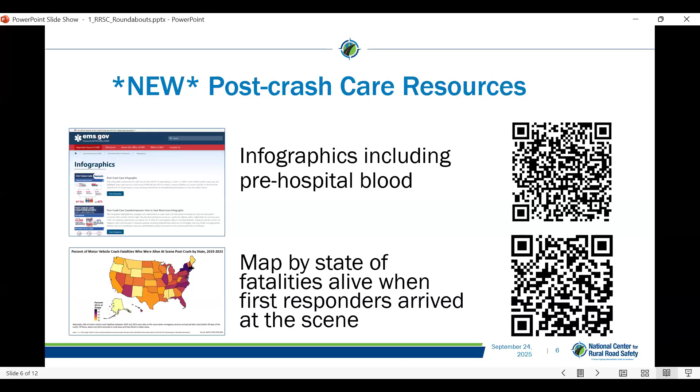If you joined us for Rural Road Safety Awareness Week this summer, here are some updated resources for you on those topics. We also have been notified that the Federal Advisory Committee opportunities are open right now. They're accepting nominations on or before October 20th for the Motorcyclist Advisory Council and the National Emergency Medical Services Advisory Council. So if either of those are of interest to you, please go to these QR codes to learn more at their Federal Register notifications.

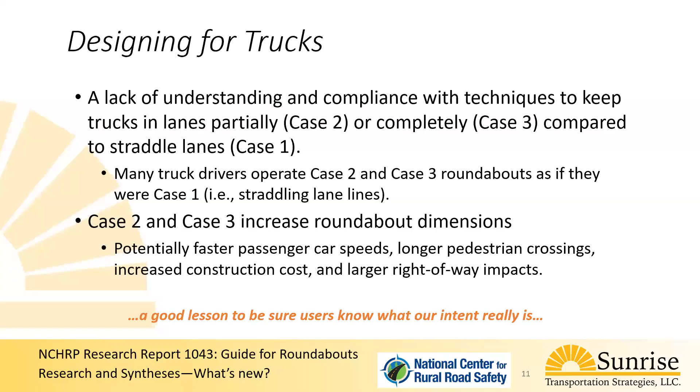But I think here's a really good lesson. We as engineers were designing for case 1, case 2, case 3. Our users, the truck drivers, didn't know how to use them. So let's make sure we know where and how our users operate.

So the guide itself recommends two things: straddle lanes or stay-in lanes. The straddle lane is suggested as the beginning point because most truck drivers simply don't know how to use the traffic control devices, the roundabouts. That's not saying they're bad truck drivers - it's just that we haven't conveyed that in a way they understand.

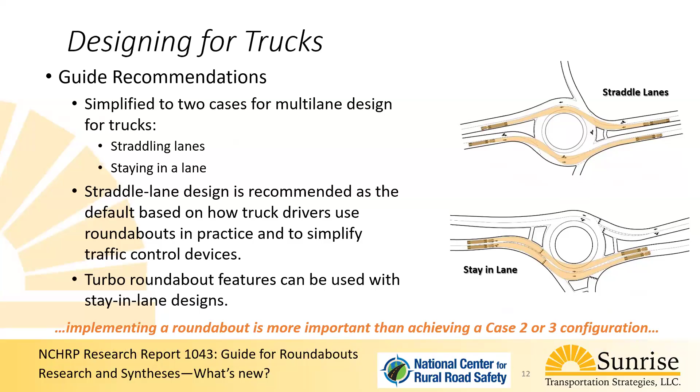But now we can use turbo roundabout features to support lane discipline for stay-in-lane designs. The intent in 1043 was that getting a roundabout implemented was more important than losing a roundabout because we couldn't achieve that former case 2 or case 3 configuration. So there's nothing wrong with designing for stay-in-lane designs, but we don't want to lose the opportunity for roundabouts if we can't get that feature.

While bicycle principles, techniques, and design have changed so much since 2010, there's an emerging typology, and what we were looking for was designing for the interested-but-concerned category of cyclists. What we find in the guide is bicycle treatments that really illustrate a range of different treatments for a variety of configurations, and you can mix and match those.

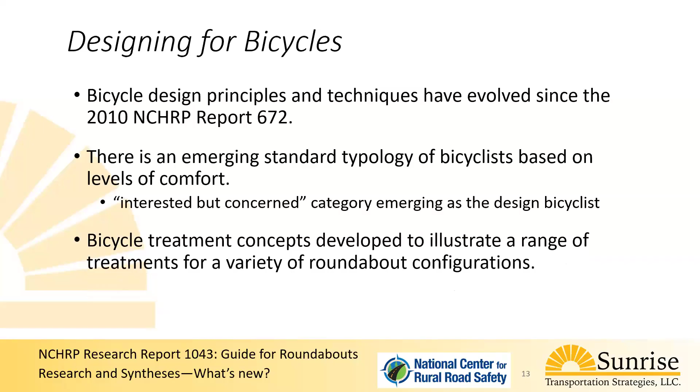But the intent was to focus on principles that allow you to make flexible design decisions for your project, for your context at that location. There's a lot of information too about designing for bikes and pedestrians, but what we were looking for is fundamental principles: reducing speeds at conflict points, separating modes where we can, clearly communicating the priority for each of the users, providing simple and direct alignments, making sure our geometrics support how we'd like it to operate, and making sure there are safe and comfortable spaces for people to work through the intersection form.

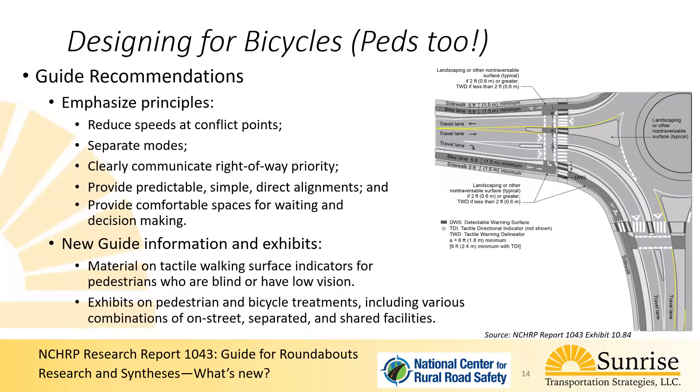So the new guide includes a lot of material about walking surfaces and how to support people with low vision, lots and lots of examples of ped and bike treatments for a variety of locations. We can't get every single one, but you can mix and match and put the pieces together.

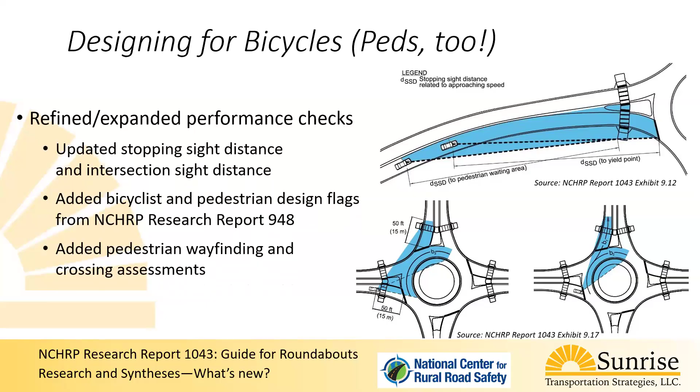There is some expanded information about performance checks, and Katie will talk a little bit more about that in her portion, but we updated the stopping sight distance and intersection sight distance. We added some new performance metrics for pedestrian and bicycle design flags from that NCHRP document 948, and added a pedestrian wayfinding and crossing assessment.

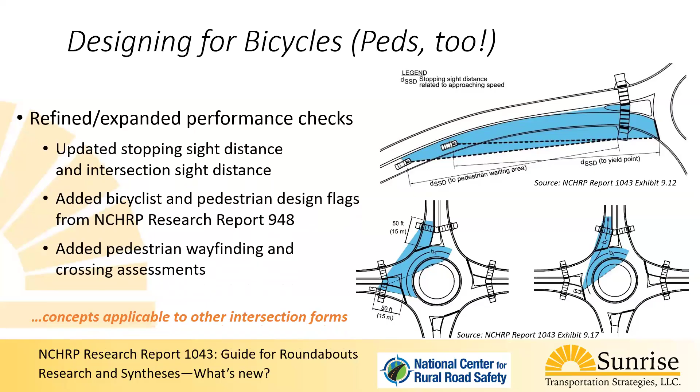The intent, what I really want to emphasize here, is that while this is for roundabouts, all of the things we're highlighting are directly applicable to your other intersection forms. So don't be limited by applying these principles only in roundabouts. Right now, I think the roundabout design guide has moved ahead, and these principles apply anywhere else.

Again, a lot of synthesis plans for oversized and overweight vehicles - these are common issues in rural environments, and Katie will talk a little bit about that. There's enough roundabouts out now that we can do in-service assessments and retrofits of our existing roundabouts to make them better. More information about mini roundabouts, economic benefit, a lot of syntheses on traffic control devices, and more information about illumination. So what we're really trying to do is understand the practices within those various topic areas.

So these synthesis plans became the input into the guidance in the NCHRP 1043 document itself. I'm just going to highlight a little bit about some of the findings from oversized, overweight vehicles. What we really found is those are often a case-by-case basis, each location with special users. So we have a lot of different examples in the roundabout guide for that.

I'll go into a little bit more detail, but what we found was providing real-world examples in the guide helps illustrate how you apply these design principles. Those performance checks that Katie will talk about are really applicable for how we check out our existing roundabouts and make them better.

Much more information about minis and compacts, and I'll emphasize this as we go through the conversation: the whole point was you call it a mini, I call it a compact, or vice versa—it doesn't matter. Don't worry about what we call it, but we should know that anytime we go to a completely traversable central island, there are some really significant design implications from signing and other features. So we just want to be thoughtful about it, but don't get caught up in the name.

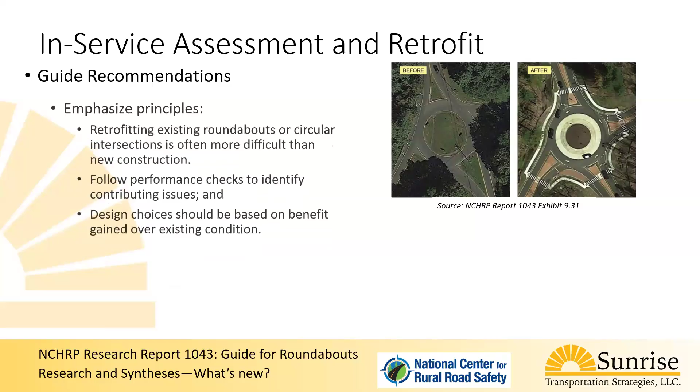If you look at the before and after, these are right out of the document. What it says is let's emphasize principles. What we know is that retrofitting roundabouts can be really complex, and it can be really expensive. So that's a good reason now to take the time to plan and design them in the optimal form originally.

What we can do is use those design performance checks to really help us understand the issues that we have. The choices we make in what we fix or don't fix should really be based on the existing condition and how we create the most value from it. So what you'll see is that in Chapter 9, there are examples of performance checks and typical modifications, and how to look at wayfinding assessments.

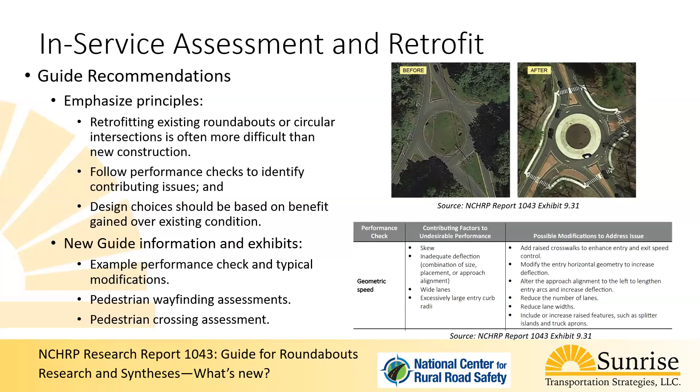That table is just an excerpt from Exhibit 9.31 that says: if I have a geometric performance check of speed, what are some of the factors that might contribute to undesirable performance, and what's a range of solutions that we might look at to address the issue. So, trying to be practical about how we can make things different.

So the principles here really focused on roundabout-specific characteristics, reflecting the fact that even if we don't have extensive illumination, we can do great delineation and mimic the geometric features that are so critical for driver operations. What we also found, and you'll see, are some roundabout-specific lighting policies for flexibility. We want to make sure we're sensitive to dark sky principles and support our design decisions.

But what's in the guide now is illuminance criteria for streets with continuous lighting, based on asphalt or Portland cement concrete.

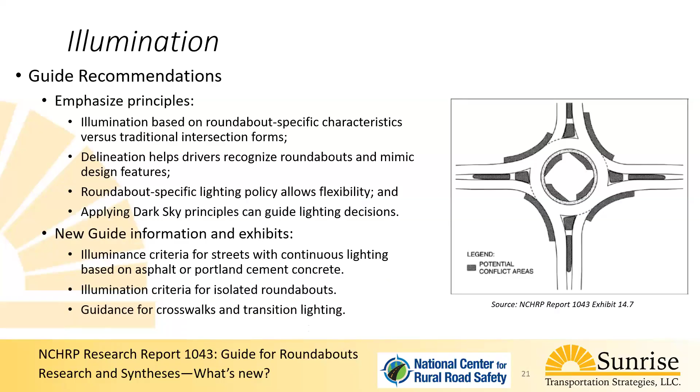It's illumination criteria for isolated roundabouts, obviously what we find in rural locations. And it's more guidance for crosswalks and transition lighting. So that's a really big important step, I think, in the guide. And again, all of this is in there. I'm just trying to give you some highlights.

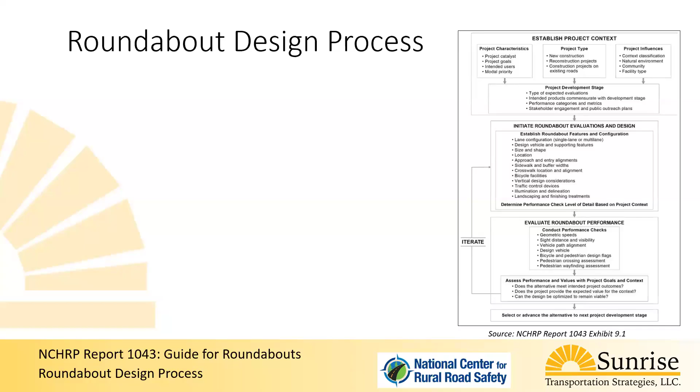So those of you who might be familiar with NCHRP 672, what we still do is have an iterative, performance-based approach. But what we're really shooting for now is an optimal design. And what we're trying to do is the performance-based approach applies from early concepts through final design decisions. And it integrates some concepts from the current Green Book 7, and it also looks towards the future Green Book 8 edition.

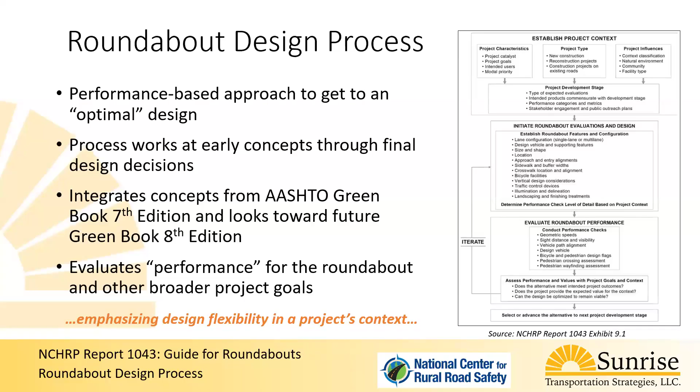But what we can also do now is recognize that performance of the roundabout can help support broader goals. So if I'm doing a main street project or a complete street project where my intent is to support a walkable community, the roundabouts can be contributing to that aspect as opposed to just focusing on the roundabout performance itself. And so what we're really trying to do, though, is that first box is establish the project context and design based on that context that you have.

And zooming in on that a little bit, what we find is it's scalable to each project development stage. So system planning to final design, the decisions that you make. It's trying to encourage flexible and adaptable design. But what it's also saying is we can look at outcomes beyond just the roundabout design. So if I have, again, a focus for complete streets or managing speed or economic growth and development on capacity, and it's okay to have roundabouts in to help support the movement of people and things, we can do that.

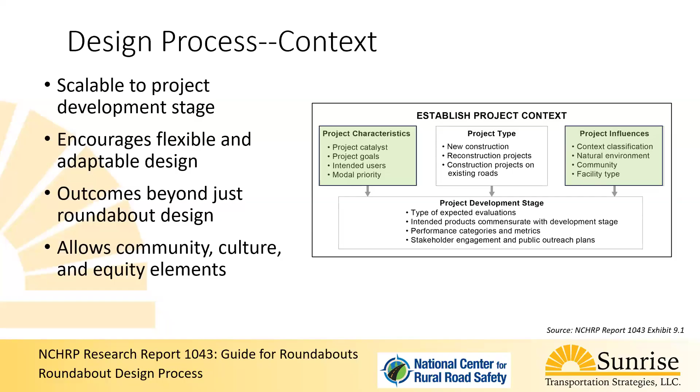But the new context allows us to think about community, culture, equity elements. So it gives us a chance to think back about, can we make things a little bit better than what was out there before? Can we fix or clean up some things that were there before? So project foundation is really the key for adaptable implementation.

So the design process is still there to iterate. The intent, and this is what really confuses some engineers, is they're not used to iterating. Iteration, changes is viewed as repetition or wastefulness. But no, really what we're doing is we're trying to modify and design the elements to best meet the target performance. Not perfect performance, target performance based on context. We want to iterate as needed and sometimes repeatedly. And it's okay to iterate. I can't communicate that enough.

Sometimes a roundabout isn't viable. Yep, I was a principal investigator for the guide, but sometimes roundabouts aren't the right location, right solution in all locations. So what we always want to do is consider context and intended outcomes about whether we want to advance that roundabout. And this is really a key part of intersection control evaluations and objectively evaluating our performance.

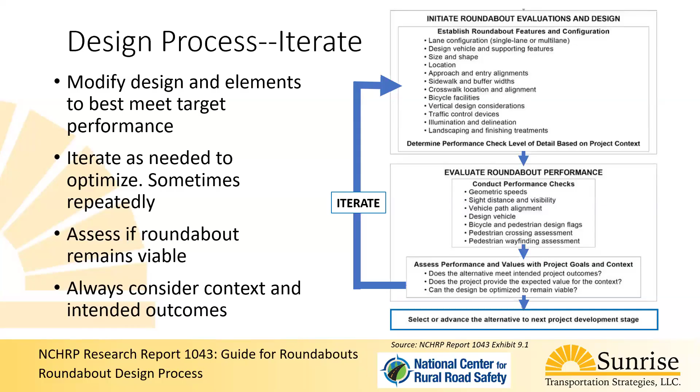A little bit about the guide itself. So for those of you who've seen it or seen it compared to NCHRP 672, it is completely different. You used to get all your stuff probably from NCHRP 672 chapter 6, and now it's changed.

But what we tried to do again was organize it by the project development process. Am I in planning? Am I identifying and evaluating alternatives? Am I in preliminary design? And often preliminary design is where moving through to investigate and support environmental documentation. Am I in final design? Am I in constructions and operations or retrofitting? But the intent was to help set up where am I in the process, and so that we can divide the guide into parts with chapter groupings that support that.

So for example, the introduction to roundabouts is characteristics and applications. If I'm in the early stages of planning and stakeholder considerations, those chapters 3 through 6 help really support some of that. And then of course, as I was just touching upon, there are 15 chapters that help support each of these project development stages.

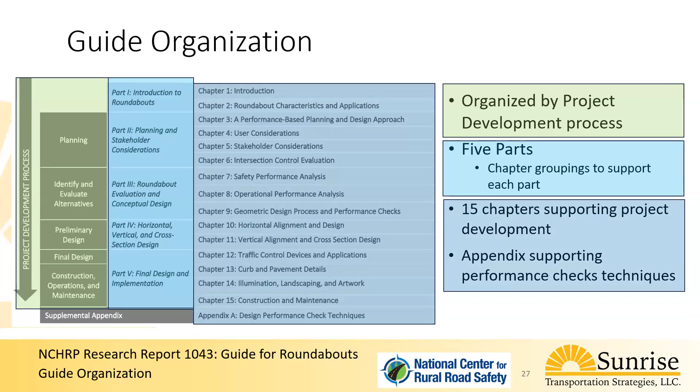And what I'll note for you is that if you look at chapter 3, performance-based process, chapter 9 is geometric design performance checks, and appendix A at the bottom is performance techniques. You can really see where and how we're emphasizing project performance and performance checks.

So really quickly in this part 1 component, there's update about roundabout history, update about the practice, really trying to be reflective that we have new policy level of practice decisions such as Vision Zero, safe system approach, roundabouts first policies, intersection control evaluations.

We want to really focus again on types versus categories of roundabouts, and we tried to note the flexibility of innovative context. A key part of this was advancing good roundabouts is better than trying to advance a perfect roundabout that doesn't get implemented. I've seen a lot of good locations where roundabouts might be viable, but because they weren't perfect, they didn't get selected.

Now, when we move into the planning considerations, that's where we're really trying to apply that performance-based approach. We're trying to emphasize the goals and the intended outcomes of a project. It's considering what the project type is. Is it new? Is it reconstruction? Am I in a constrained environment?

It's thinking about those users and really focusing in on the stakeholders. We can't emphasize enough the importance of getting out and contacting and bringing stakeholders into your process. Shannon will cover a little bit more about that, but also about intersection control evaluation activities. Context is everything in these planning considerations.

When we move into Part 3, we're now supporting concept and design activities. Often this is supporting intersection control evaluation, or ISOAP if you're in California. It includes project-level performance analysis, ways to work at a planning level, ways to work into more detail. We're trying to make it easier for you to assess performance using a variety of techniques commensurate with where you are in the project development process and what level of information you have to work with.

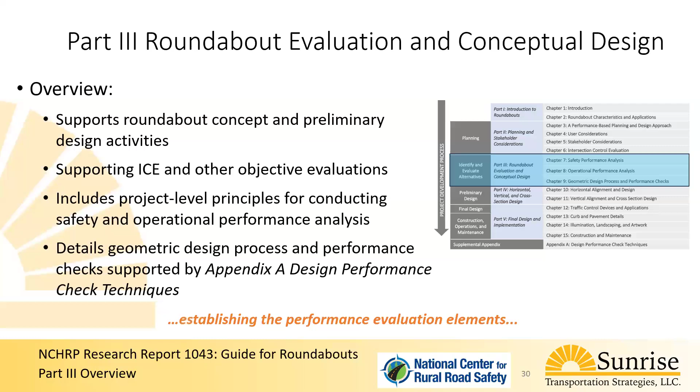A lot more information that supports and is expanded upon in Appendix A. But we really need to make sure that we're establishing the performance evaluation elements first so we can test how well we got there. Part 3 highlights in the guide include updated conflict point presentations about multi-lane approaches, a lot more information about safety analysis, information that we can look at traffic operations, and some planning level tools based on the Highway Capacity Manual.

We really focused in on the design vehicle for designing for versus accommodating. What we want to make sure is we're designing the roundabout for that common design vehicle, but we're making sure we understand what can happen if we have that larger vehicle. And obviously in rural locations, we can have some special vehicles that come through.

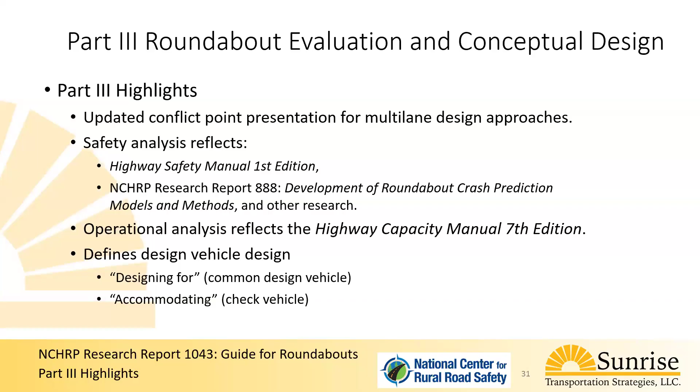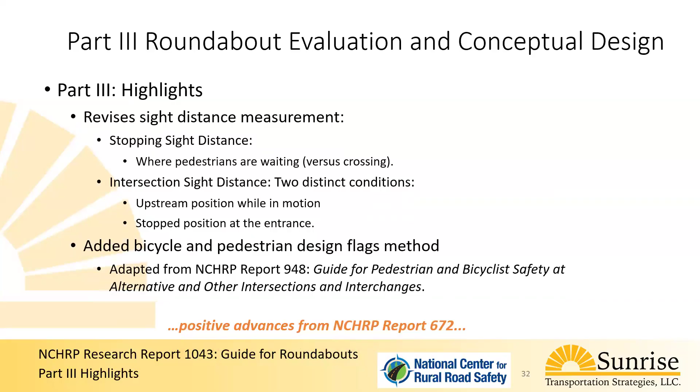All of this is guided by the research that we did. In the highlights again, as I mentioned, we revised sight distance for intersection and stopping sight distance. We added a lot more about peds and bikes. All of these are really positive advances from the good work that was in NCHRP 672.

Now, when we move into preliminary design, what you'll see is those two chapters of horizontal and vertical, chapter 10 and 11. You'll probably, as designers, spend most of your time in chapters 10 and 11. But it's really how do I establish horizontal, vertical, and cross-section features that integrate each user? And that's a key point.

We don't wait and see how peds are afterwards. We integrate pedestrians, bicyclists, their considerations at the onset of our geometrics. What we're really trying to do is reflect that performance-based approach from concept into preliminary design. So we want you to be able to work at a systems planning level and understand size, shape, and some of the features.

But now we want to move into and support your design decisions through final design. It's all of the content you'll need for horizontal, vertical, and cross-section design, and these apply to final design. So while we're getting the 3-dimensional design here, those of you who have done roundabout work know that we need to get into and apply that at the planning level.

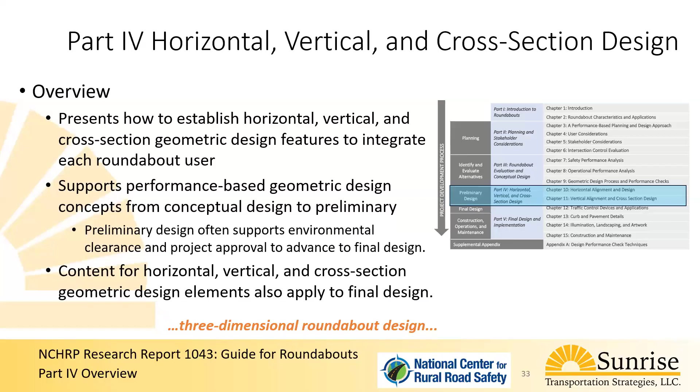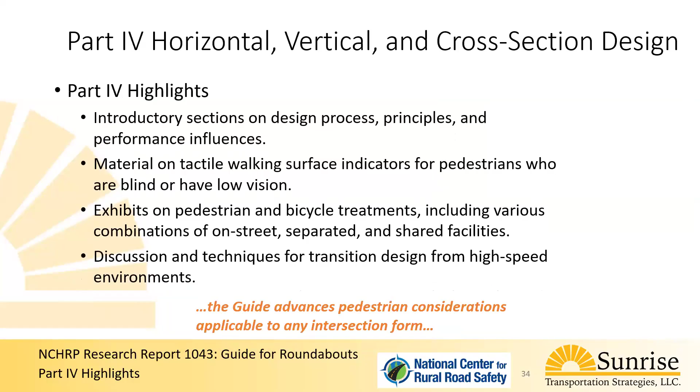So again, there's a lot of information about the performance influences, a lot more about pedestrians and those users with low vision, a lot more pedestrian treatments and examples, and then discussion from high speed to low speed. I'll touch upon that for a second.

We get more into oversized and overweight vehicles, lots of expanded text in chapter 10 about compact features, mini roundabouts, and more content about turbo design. So let me tell you, don't be tripped up by turbo design.

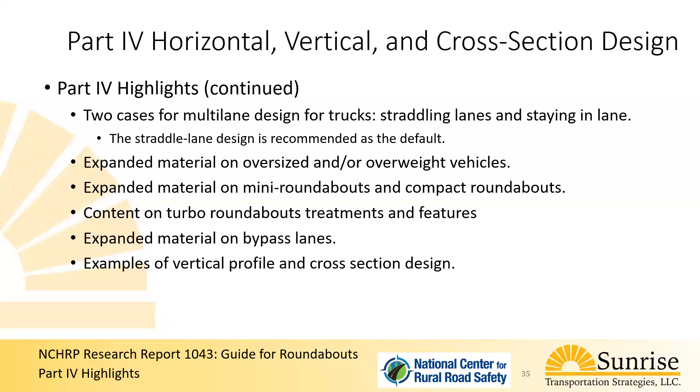We really tried to demystify that to say a turbo roundabout is a multi-lane roundabout that has features or elements that support lane discipline. That's all there is, so just keep that in mind. Don't get mystified by a turbo. But anyway, there's a lot more information to support your decision making.

So I wanted to quickly touch upon the historical safety value of rural roundabouts.

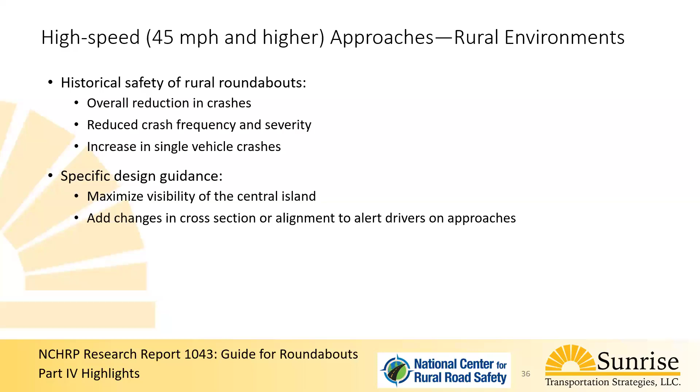Overall, it's a reduction in crashes, truly reduced crash frequency and severity. There can be an increase in single vehicle crashes, but the key is we're trying to maximize visibility at the central island, with changes to the cross section to alert drivers.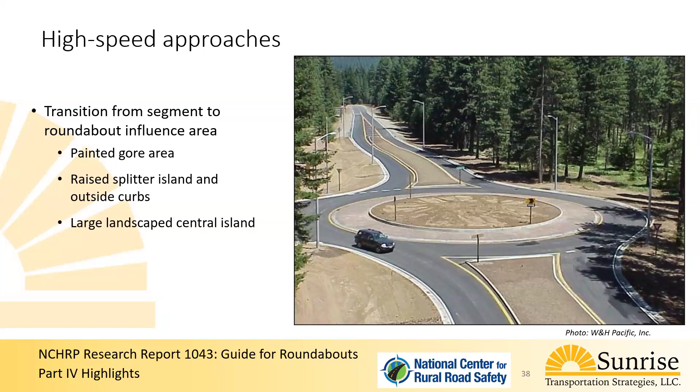Well, this was right after construction. I assure you that this roadway, this portion today, is quite vibrant.

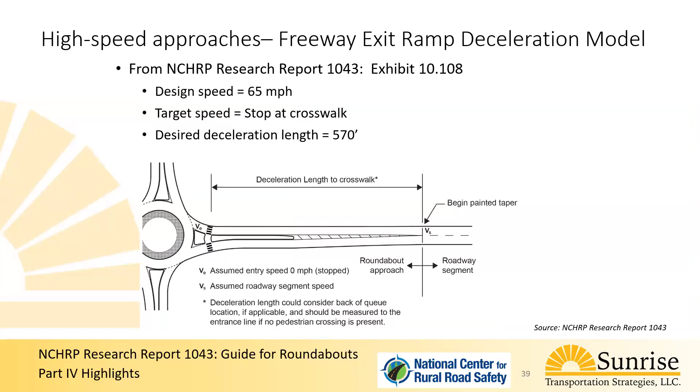Just a quick example using Exhibit 10.108: if you had a design speed of your roadway of 65 miles per hour, with a target speed at your crosswalk of 0 for pedestrians, this helps you identify that the desired deceleration length is 570 feet. That can help in your real application - at my roundabout, I might need to be looking at 500-600 feet upstream.

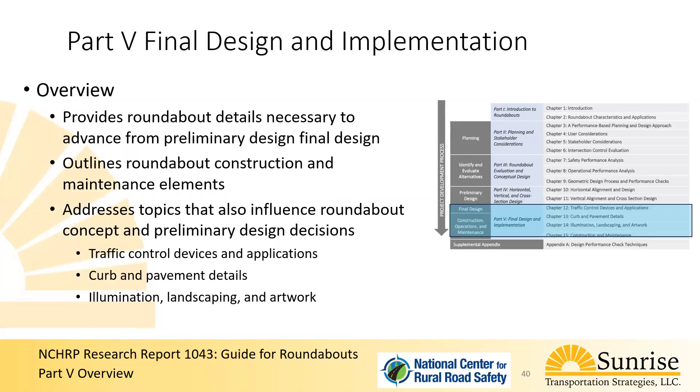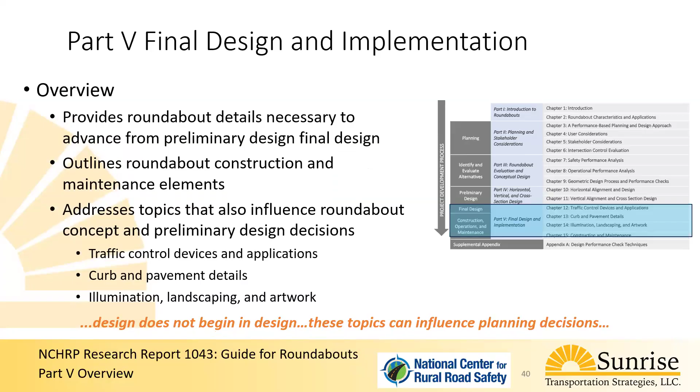Part 5 is design and implementation - how do I get from preliminary to final, a lot about construction maintenance elements, traffic control elements, curb and pavement, illumination. I really want to emphasize that design doesn't begin at design. So many of these topics about curb details, pedestrians, pedestrian hybrid beacons, construction sequencing and maintenance - many of these questions actually can inform your initial design. It's a really interesting process in roundabout design.

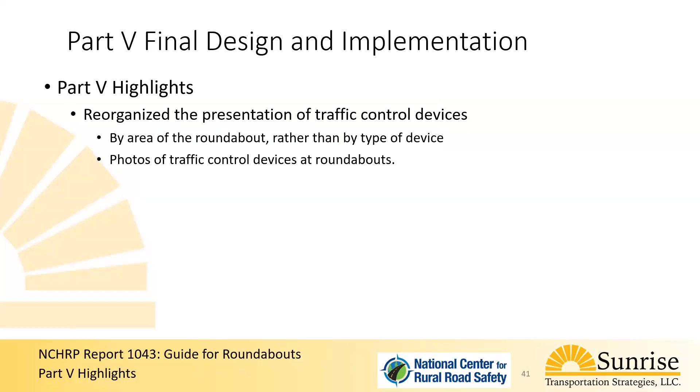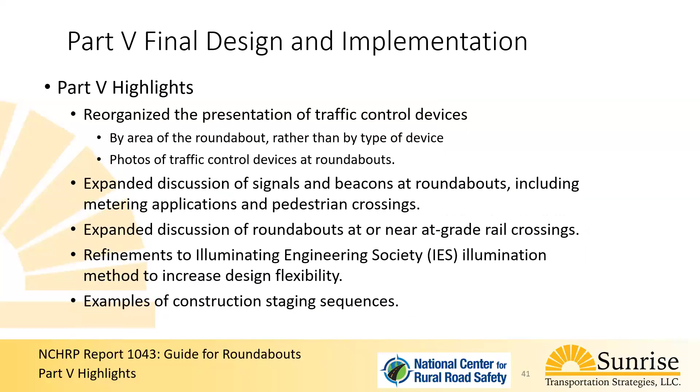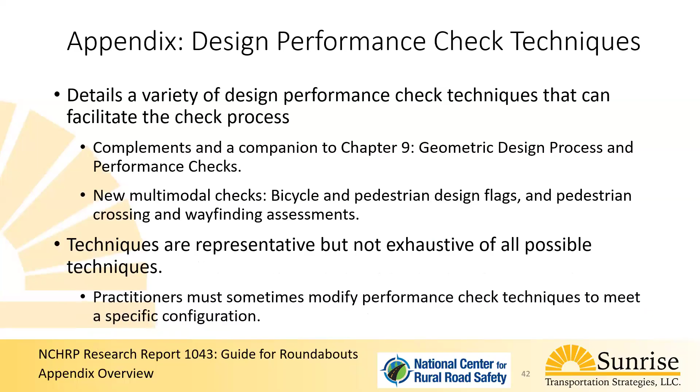In closing, roundabout design continues to evolve for the better. NCHRP Research Report 1043 builds upon and expands the really solid base of NCHRP Report 672. Rural conditions are wonderful opportunities to apply roundabouts, and the safety performance alone is just outstanding. NCHRP 1043 provides principles to support design flexibility in rural applications for your planning, design, and implementation.

We're going to put questions to the end. I just want to encourage you that if we can't cover any of your questions today, contact me - happy to share how we can help you implement 1043. And with that, I'll turn it back to Jamie.

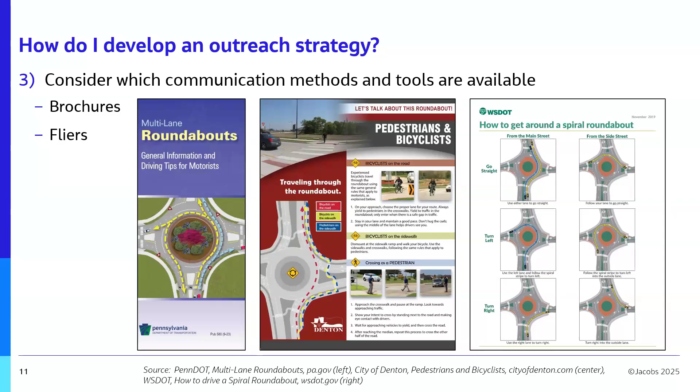Now, these last couple that I want to share are a little bit different than the others. The first one is a roundabout rodeo. If you have a good big paved area that you can survey out and paint a roundabout to scale on, then invite your freight, agriculture, and emergency services - that's great to let them come do a drive-through and gain comfort and confidence in both your design and their abilities to drive through it. I've seen where sometimes drivers will also ask a project member to do a ride along.

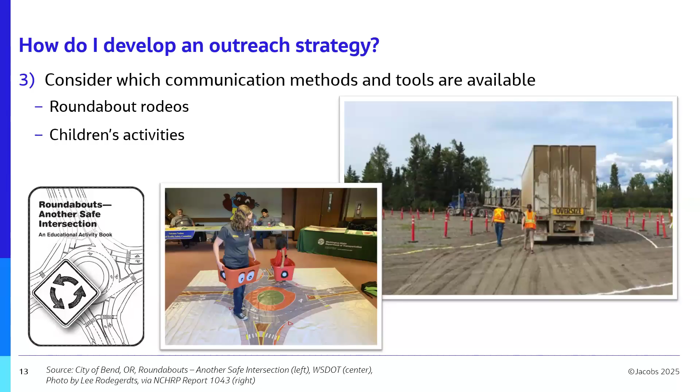Another thing I really want to hit on here is when you have in-person events, think about having kids' activities available. Not only does this help kids learn about what we're doing and make roundabouts more normalized and less of a concern for them as they grow up, but it also gives mom and dad a little bit of time to talk with the project team, learn what's going on, maybe get some education as well, while the kiddos are safely taken care of.

Okay, so now we've got our goals, our audience, our tools. Now it's time to make our outreach plan for each of those groups. We need to think about what they need, what information they need, how they like to communicate, where are we going to reach them, how often, and who do you need to reach out to first? All the different groups may be getting similar but slightly different information, and that's great, that's appropriate.

But considering who you need to reach out to first can be really important. Reaching out to decision makers first, we want to get that high level of concurrence and buy-in before we go and talk to property owners or the general public. Because if the decision makers don't agree, they can shut down the project. Also, if you have a low level of trust with your decision makers for whatever reason, it's going to take more work to get their buy-in. So be aware of that, and that it's not always a quick process. It can definitely take time.

So once we've got all that figured out, we execute the plan. We plan the work and we work the plan. Now, this is all kind of a lot, I recognize. So let's go through a sample outreach plan that was inspired by one of my favorite projects, working with a tribal nation. Yakama Nation had overlapping jurisdiction for this project.

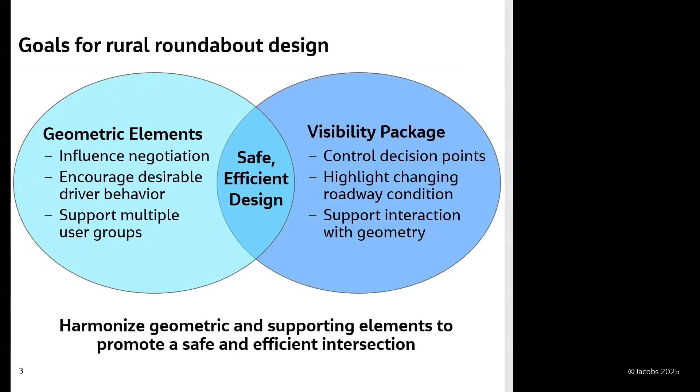These serve to strategically draw attention to the changing condition, define our decision points, and reinforce the geometric design. Our goal is to harmonize these elements to provide the safe, efficient, low-speed environment that makes roundabouts such safe intersections. So to make sure we're all on the same page, I want to quickly define a few terms I'll be using through the rest of the presentation.

First, we have inscribed circle diameter, or ICD. This is the outer edge of the circular intersection. While it is often a circle, it can also be an oval or a peanut shape, as that might fit better into a skewed intersection.

Next, we have the circulatory roadway, which is the counterclockwise travel path around the intersection. Continuing inward, we have the truck apron. This is for large vehicle off-tracking. It's typically raised above the travel lane by a few inches. You'll see this in the center of most roundabouts, but you may see additional truck aprons along exterior curb lines as well. Then the innermost portion of the circle is the center island.

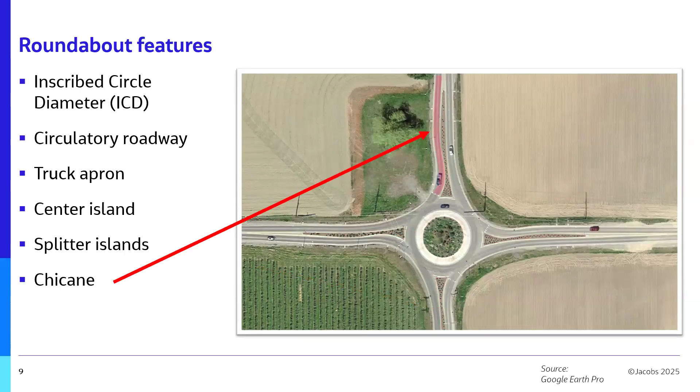It's often domed and landscaped, providing target value to cue drivers to the changing condition. Moving back outward to the legs, we have our splitter islands. These are generally raised, but the characteristics can vary quite a bit depending on the approach roadway. And then lastly are chicanes. These are the successive reverse curvatures on the approach that help induce that natural deceleration. Chicanes are common on high-speed approaches, but they're not necessarily required.

So horizontal geometrics are the foundation of a roundabout's success. Good roundabout geometry requires three things: proper deflection, where the geometry and channelization need to point drivers in the right direction; second, appropriate speed control, where approach geometry needs to have drivers slowing down; and third, a fluid drive path—it should be comfortable to negotiate the roadway, no sharp movements or jerking of the steering wheel required.

I want to make a distinction that most of roadway design is code or dimension based, like the Green Book or State Design Manual. And as Brian mentioned earlier, roundabout design is performance based, meaning the success of a design is verified by its ability to meet the needs of the unique user group while implementing these three key principles.

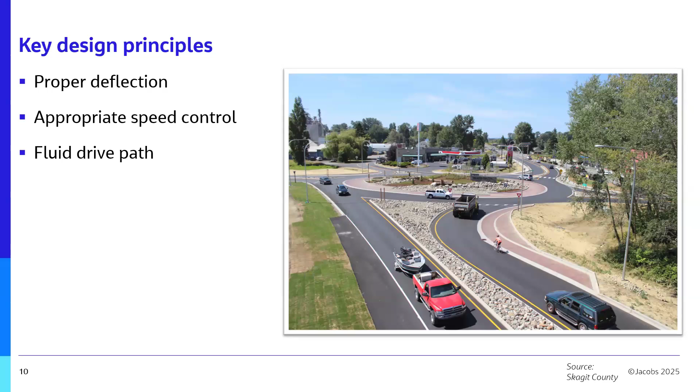While all three of these principles are important, the one I want to zoom in on today is speed control. This is essential to obtain safe operation for a roundabout with high-speed approaches, like we see in a lot of rural settings. The approach geometry must induce the natural slowing to get us down to the circulating speeds, which are typically in the 15 to 25 mph range.

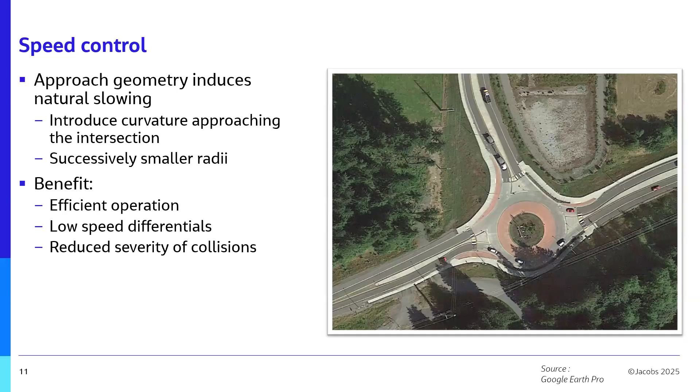This is often achieved using chicanes with progressively smaller radii as you get closer to the yield line. This gets us the low speed differentials between the movements, which in turn reduces potential collision severity. We also get efficient operation from this by allowing for natural deceleration and acceleration patterns.

I'm going to zoom out onto a leg here and talk about a few different elements. On high-speed roadways, it's important that we provide adequate advance warning to comfortably have drivers stopping by the yield line or by the crosswalk if we have them. We can apply operation and design principles similar to freeway exit ramps, remembering to account for any grades.

This graphic here depicts a tangential approach, but if you have chicanes, remember to consider the super elevations that may be necessary as you're selecting the horizontal radii for those especially broad and mid-range radii of your chicane.

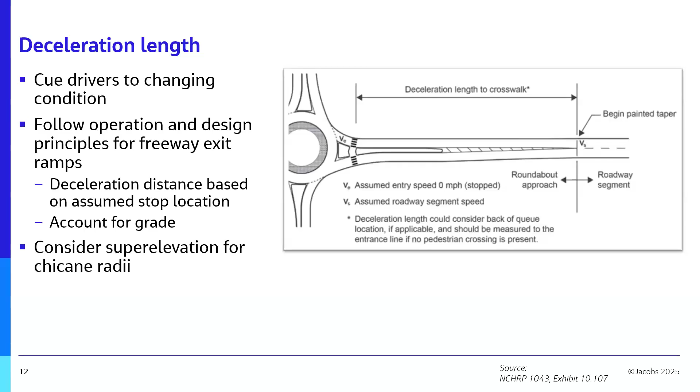So splitter islands are going to be encompassed within that deceleration length. A rule of thumb I really like to use is to have the splitter island match the length of my stopping sight distance. This isn't always feasible, but in general, the higher the approach speed, the longer we want our splitter island to be to provide as much advance warning as possible.

In the case of rural roundabouts, we generally want splitter islands to be raised and non-traversable to assist with visibility on the approach. For hardscaped islands, it's important to prioritize color contrast—for example, if you've got asphalt pavement, try to avoid black or dark gray for your splitter island color. This prevents them from blending in with the surrounding pavement. You can also consider using distinct colors for splitter islands and truck aprons to help freight differentiate between surfaces intended to be mounted, like truck aprons, and non-traversable surfaces, like our splitter islands.

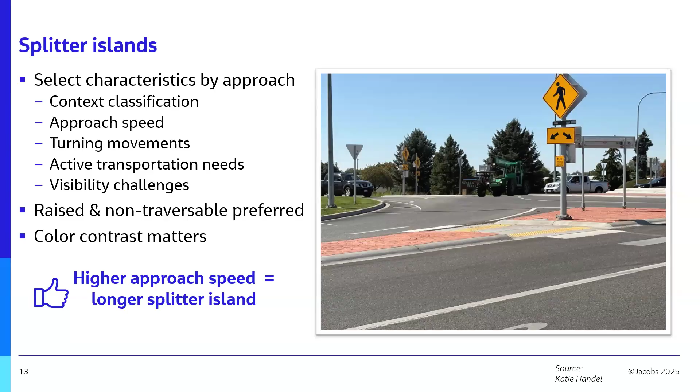Most rural roads have paved or gravel shoulders, but it is recommended to introduce curbs as you approach a roundabout. Exterior curbing provides drivers the sense they're entering a more controlled environment, and it helps visually narrow the travel lane, which encourages natural slowing in conjunction with horizontal curvature. I often like to start my exterior curbing right around the nose of the splitter island, like is depicted in this photo on the right.

Mountable curbing is recommended for high-speed approaches, as it's less likely to be damaged by an errant vehicle.

It's important to note that just because we have exterior curbing does not mean we have to have a closed drainage system. We could provide curb openings or scuppers, like these two photos on the lower left, that allow us to maintain more of a natural drainage pattern. Another strategy I like, especially for rural locations, is grading the roundabout so that the ICD is the high point of the intersection. Not only does this help with visibility on the approach, but it lets water drain away from the center naturally, so we can avoid having that closed drainage system.

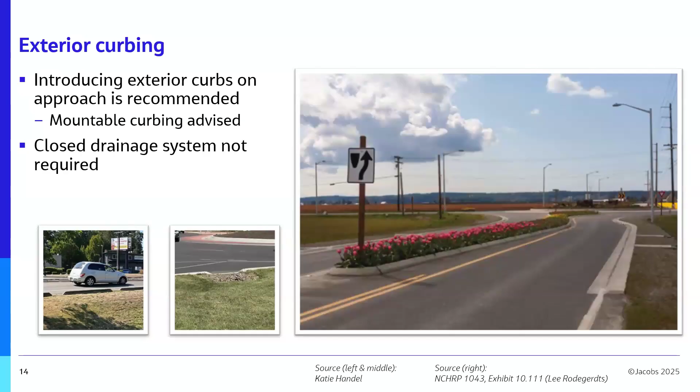The last geometric consideration I want to touch on is active transportation. Even in a rural environment, we still want to consider our non-motorized users. Not everyone drives, and we often still see cyclists or joggers out in rural areas. At one of the roundabouts Shannon worked on with Yakama Nation, there was actually video captured of folks using the RRFBs and crosswalks on horseback. So we have lots of different types of active transportation, even in rural areas. This is definitely an evolving practice.

While we might not build full-scale active transportation facilities in rural areas now, we also don't want to preclude them in the future. These strategies I've seen applied at rural roundabouts to make space for active transportation include things like at-grade or raised shoulders, as depicted in these two photos here from WSDOT. These are shared facilities, just like a normal roadway shoulder, but in the case of a roundabout they can serve the dual purpose of supporting active transportation and large vehicle off-tracking.

I've also seen agencies go ahead and construct a median opening in a splitter island with no detectable warning, since there's no actual pedestrian receiving facility, or just plan ahead and leave space in the splitter island for them, doing an asphalt infill that can be easily removed if they want to add active transportation facilities later. Another thing I've seen is some agencies aren't constructing any facilities at all right now, but they are being forward compatible by buying right of way or grading a level pad outward in order to easily come back and add a future installation.

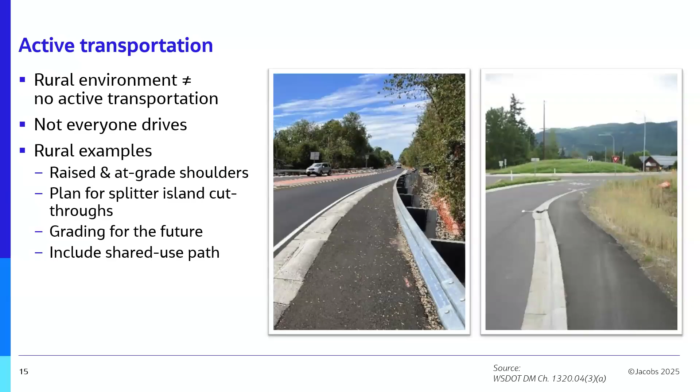Change gears and fast forward a little bit, say you've completed your initial 2D layout. Now it's time to verify that layout meets the needs of all your users. I like to make exhibits for every roundabout to vet and document the design. Like Brian stressed earlier, design is iterative. These checks will help you understand where you may need to adjust and optimize your roundabout.

I have some of the single lane roundabout performance checks listed here, but in the interest of time I'm going to zoom in on the two today that I feel are most important for rural roundabouts: turning movements and speed control. I encourage you to check out Chapter 9 of NCHRP 1043. It does a nice job explaining all these different checks, and there are samples for practical application provided in the appendix as well.

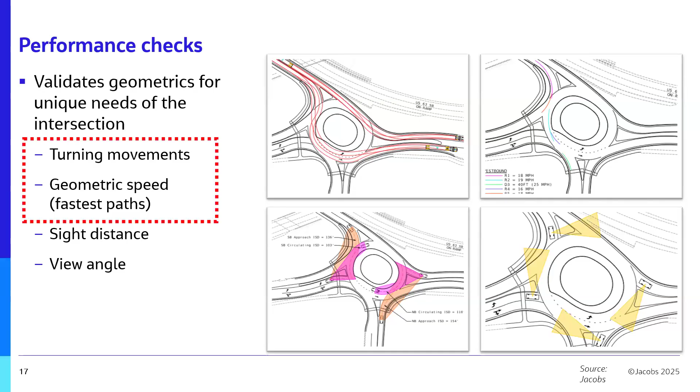Before we run our turning simulations, I want to encourage you that it's really worth the time to determine what vehicles realistically need to traverse the roundabout. Most likely, not every large vehicle is going to be making every movement. Taking the time to right-size our roundabout prevents under- and over-design. It helps protect our investment, reducing the likelihood of damaged curbs or signs, and it also helps build a positive relationship with the freight community when trucks can negotiate comfortably.

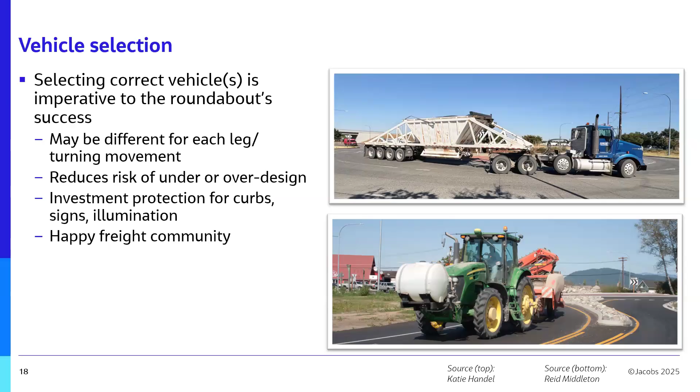I want to start by making a distinction between a design vehicle and an accommodated or controlled vehicle. A design vehicle is our regular user. For example, on a state highway you probably see several WB62 or WB67 tractor trailers a day. Your design vehicle should be traversing the roundabout with the truck cab in the lane, but the trailer may off-track onto truck aprons or shoulders.

Remember, design vehicles can be selected by movement or leg. The major leg might need to support WB67s, but maybe the minor leg just needs to accommodate a school bus or a fire truck, something a little smaller.

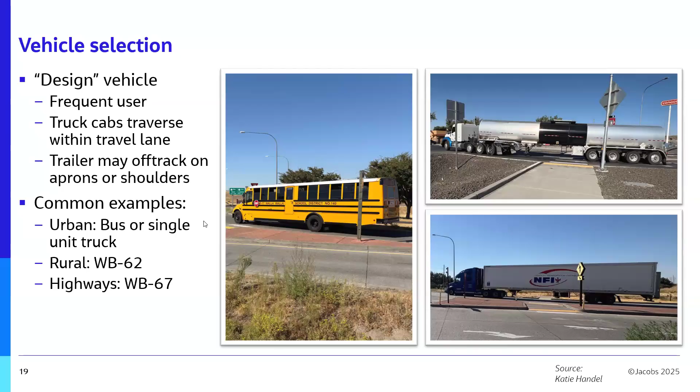On the other hand, there's our control vehicle. This is an infrequent user—think once a week, once a month, once a year, or some that only come up every few years, maybe moving at night. They're very infrequent. This could be anything from a lowboy to farm equipment to wind turbines or refinery equipment. Control vehicles are usually making specific movements.

I like to request records from my state's permit office to see what loads have traveled through the intersection in the past and with what frequency. This helps me get a good idea of what may need to move through it in the future and what we can realistically accommodate with the design.

For oversized overweight loads, it's important to pay attention not just to the trailer swept path, but the load overhangs. This can be in length, like this pole truck you see in the top photo here. Those logs hang quite a bit off the back and swing quite a lot laterally off that back end and even between the axles. So you need to watch where you're placing your signs, luminaires, or landscaping to make sure they don't get damaged by some of the large loads.

For lowboy trailers, we also need to pay attention to low vertical clearances. Carefully site your high points in conjunction with the turning movements to prevent these trailers from high centering.

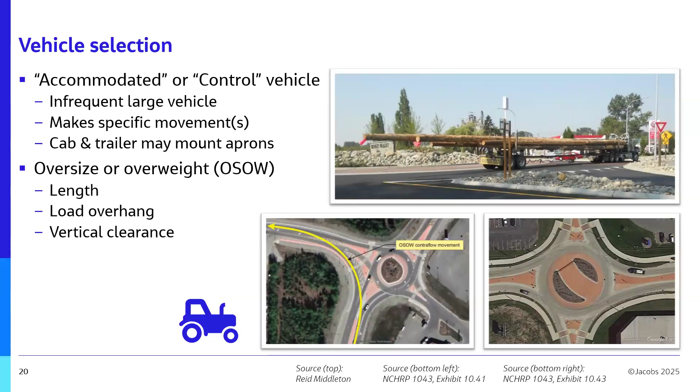That brings us to conducting the actual performance checks. I just want to quickly cover a few rules of thumb for turning movements. We want to conduct any simulations using smooth, natural drive paths—no stopping of the vehicle or sharp steering wheel turns. Trucks tend to negotiate roundabouts pretty slowly, so you can reduce your negotiation speeds to more accurately reflect the vehicle's capabilities.

I like to provide a minimum of a foot of clearance to the face of curbs and keep tires off gutter pans when doing simulations. Instead of designing for an A+ driver, maybe aim to design for your C+ driver to provide a little wiggle room, help protect the curbs, and make it more negotiable.

The interior truck apron is also sized using these turning movements. 3 to 15 feet apron width is pretty typical—I'd say maximum of 20 feet, because when you start getting wide aprons you start losing your center island, which provides the target value on the approach. If your apron is coming out to need to be larger than 15 feet, it might be a good time to pause and evaluate if your location might be better served with a larger inscribed circle diameter.

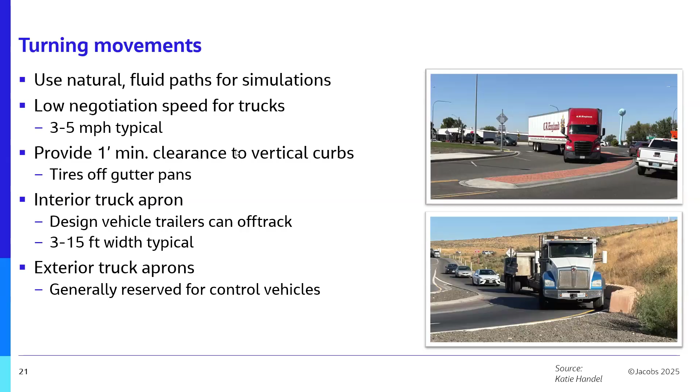The other performance check I want to zoom in on today is geometric speed, also commonly referred to as fastest path. It's a quantitative evaluation of our speed control using offsets of geometric features to estimate the fastest drive path through the roundabout. The resulting radii then correlate to negotiation speeds. This is where we check that we have low speeds and low speed differentials between movements, with the R1 speed—the entry—being the most critical, due to it often having the highest differential relative to circulating traffic. There are several objective and repeatable methods out there to calculate fastest path. NCHRP 1043 provides some nice resources walking you through this in Appendix A.

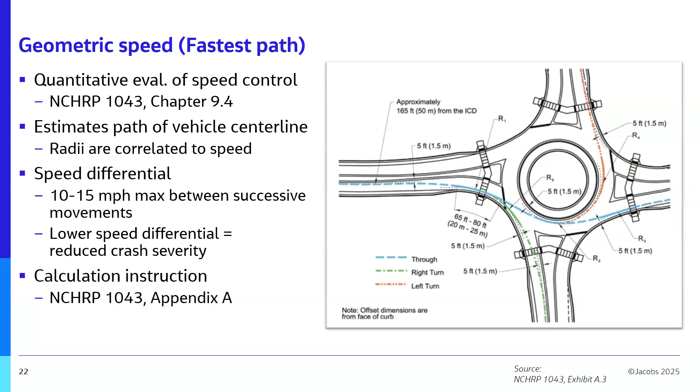We're going to jump forward here since we only have 15 minutes, and say we have our 2D layout locked in. At this time we're going to change our focus to supporting elements. The elements I want to touch on today are some I feel are most important to rural roundabouts, including signing, marking, lighting, and landscaping.

The treatments I'm going to highlight today are certainly not an all-encompassing list, but rather just a few I've seen successfully applied at rural locations to enhance visibility. I want to reinforce that these supporting elements are here as an enhancement and to improve operations—they are not a substitute for sound geometric design. I encourage you to draw on what we already know works; maybe use some of the FHWA proven safety countermeasures and see if there's an application you can use for your roundabout too.

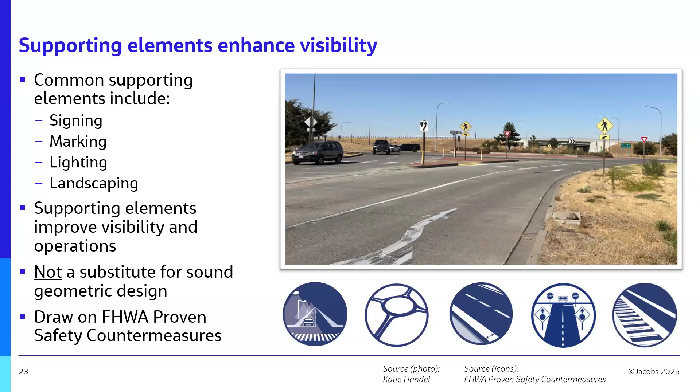So first up is signing. Advanced guide signs are recommended for high-speed approaches. They serve as an early warning to the changing condition, and they help spread out the decision points for drivers as they're slowing towards the intersection.

On the US 97 roundabouts, WSDOT installed flashing beacons along with the gated warning signs. I don't think it was intentional, but the beacons are actually operating at slightly different wigwag rates on either side, and it's really eye-catching. I think it helps a lot with the visibility on a high-speed approach.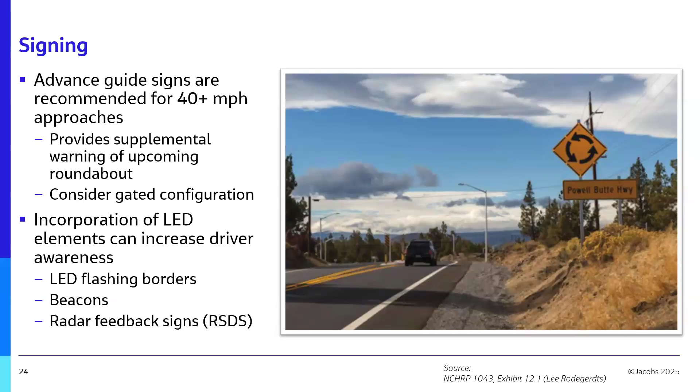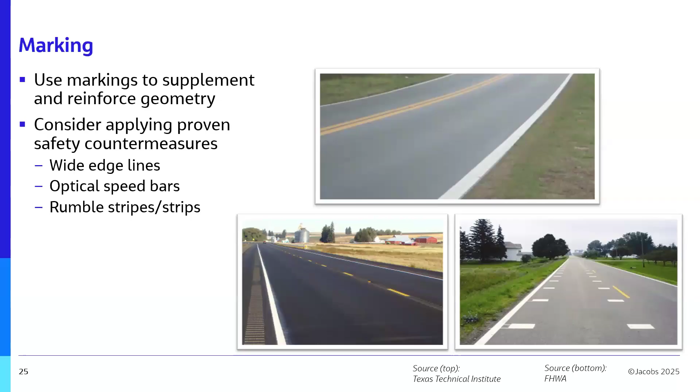I really like the optical speed bars because they help visually narrow the travel lane and they encourage slowing as the bars become more tightly spaced. All of these marking treatments are relatively low cost, but they can make a big difference in your visibility.

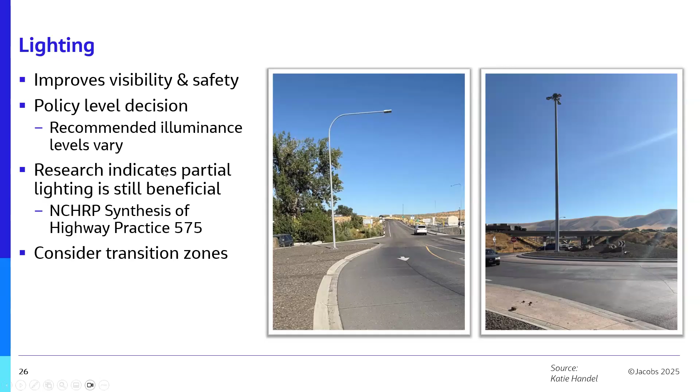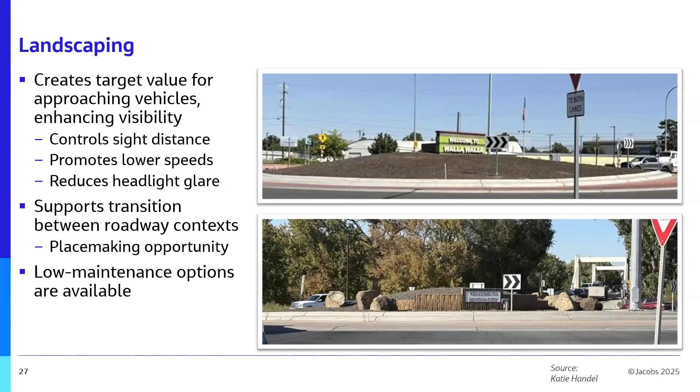Typically, we want to see something low maintenance, especially for rural locations. I've seen several really neat hardscape or rock options that can still provide the safety enhancements we're looking for.

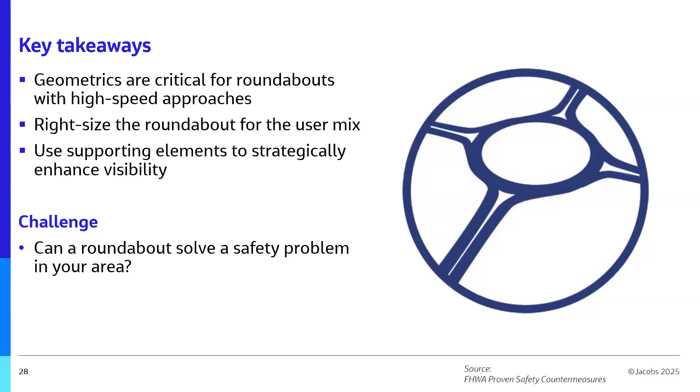I hope you can leave today's webinar, from great presentations by Shannon and Brian, feeling ready and confident that roundabouts can help solve a safety problem in your area. That's what I got. Thanks for joining us.